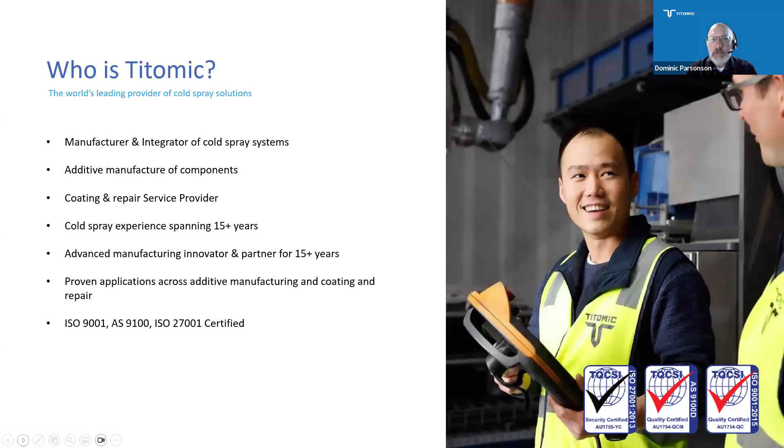So if you look at our low and medium pressure and high pressure activities in cold spray, we recognize the value that cold spray can add across a broad range of industries, but we try to narrow it down where we can add the best value, and we leverage the things that make cold spray unique. High-speed manufacturing, low heat-affected zones, ability to blend metals that typically don't belong together, and the ease of use in many applications.

So we have worked for the last 6 months with a large oil and gas company in Australia, looking at it not just as a technology work, but how do we certify it? How do we validate that it works over and over again, and working on repeatability? And this is where Titomic works with its team globally to ensure that we don't just provide you with a machine that sprays metal, but we provide you with the complete solution. Next slide.

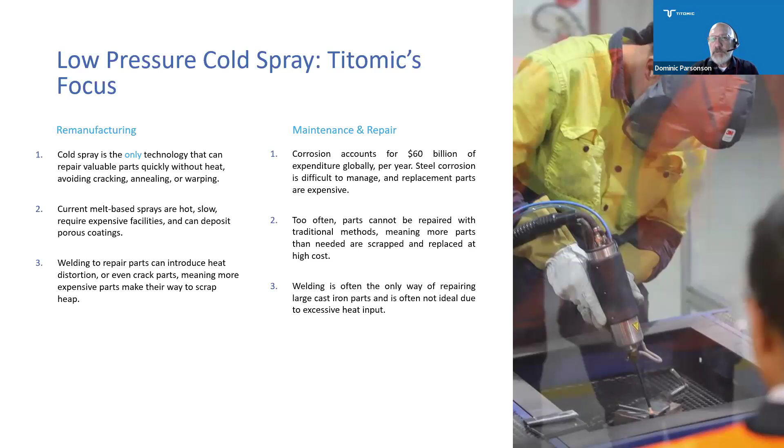And that's the key focus area for us, always ensuring that not only are we depositing a metal, but that we are depositing a metal that genuinely performs the way you'd expect it to perform. We don't believe it's good enough to be able to put material in a powder feeder, spray it, and say, look, we have sprayed metal. We believe in validating with clear data and performance specifications that this material behaves the way you would expect it to behave. And that's often work done from an R&D perspective within Titomic, or work done collaboratively with a customer or a research institute.

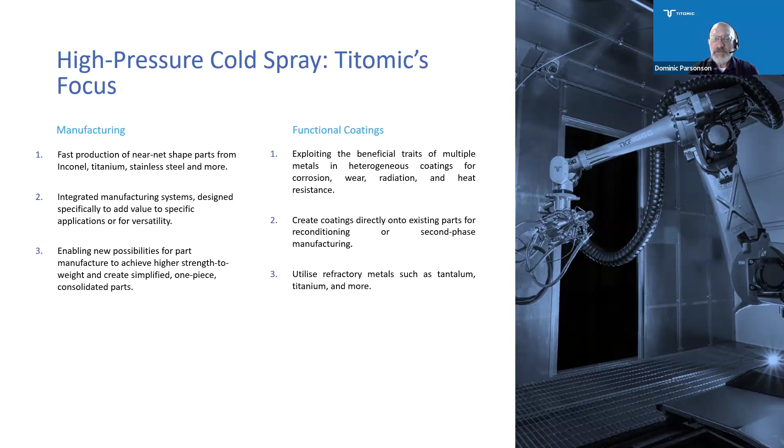We put a lot of effort into functional coatings, and functional coatings are coatings where the coating is more than just geometry restoration or corrosion, where we are adding the capability around thermal barriers or electrical performance. And this is an area we see enormous growth in both aerospace as well as electrical and terrestrial applications. Next slide. So Titomic is global.

We have head office in Melbourne, we have manufacturing and research centers in Europe as well as in Australia, and we have a small technical center in the USA, growing very, very rapidly. And in fact, I wouldn't be surprised if you see the USA starting to overtake the world in the next 18 months or so, if not quicker. We have a broad reseller network around the world, ensuring that we can provide service, support, and technology to our customers as they need. Next slide, please.

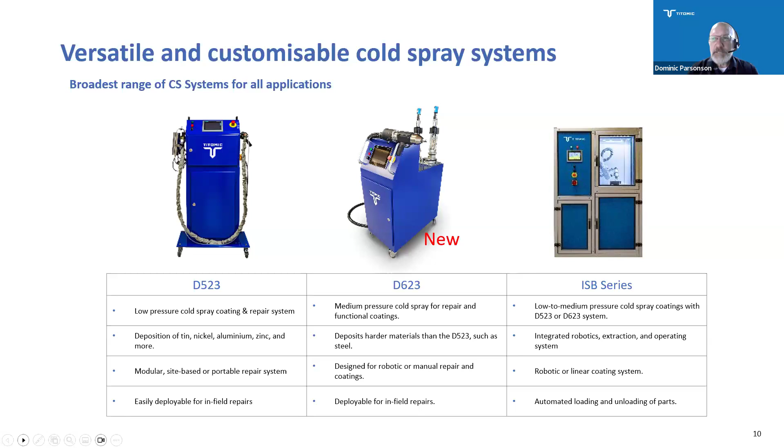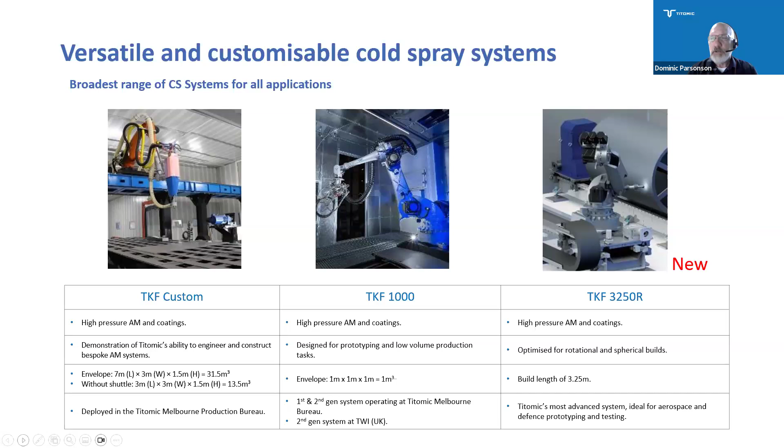And then we recently launched our TKF 3250R, which we commissioned in January in Australia, and that is our newest solution. So it's optimized for rotational and spherical builds, can do parts up to 3.2 meters in length and almost 2 meters in outside diameter, depending on the weight of the part. It's got an advanced and new control system, and it's something we're incredibly proud of. In fact, we have a photo of some of the Solvus team visiting us, where we were proudly demonstrating this machine to them. That has now been running for 5 months and is proving to be a phenomenal addition to our portfolio. Next slide. So that's enough about our machines and what it is we do.

Now I'd like to focus on some real-world applications. I'll be talking about the additive manufacturing opportunities and applications we've worked on. Neil will cover the coating and repair. So in additive manufacturing, we break our business into armaments, ballistic protection, structures, and tooling. And the reason we've done that is so it becomes easier to explain to the market what it is we're doing and easier to advocate for the technology. Those capabilities go into a broad range of areas: transport, automation, mining and resources, defense and aerospace.

But typically we favor anything that is rotational, cylindrical, spherical, or large flat surfaces that have a slight two-dimensional curve to it. And that's where tooling starts to add value. But the benefit of cold spray in all of these applications comes down to the well-known characteristics of high-speed deposition, excellent mechanical performance of the material, high density, and the ability to replace casting and forging with a near net shape as rapidly as possible.

So for those of you who may not be familiar with cold spray, we always highlight here that cold spray is not a competitor to traditional manufacturing. It is not a competitor to powder bed fusion or E-beam or any of those technologies. It's an added tool in the toolbox for a manufacturer to provide solutions to the marketplace. So we can't do those tiny, highly specialized parts you would typically see from a powder bed fusion type additive manufacturing space, but where we really add value is size, speed, and near net shape. Next slide.

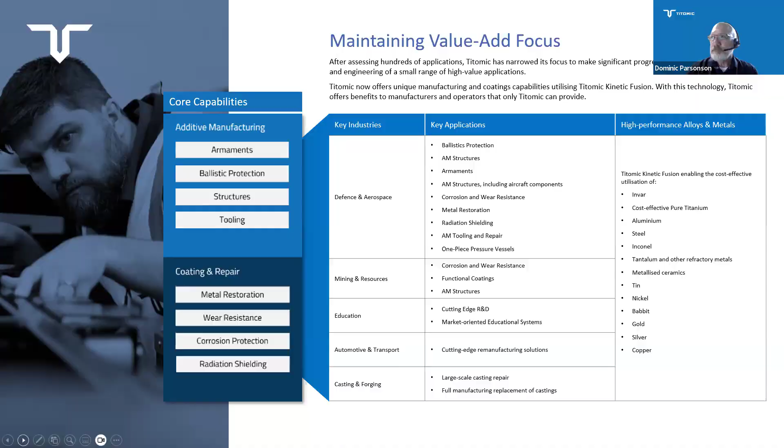So I've got a few applications I want to show you that are real-world applications. This is a very large rotational part that was produced in commercially pure titanium. And a number of you may throw your hands up and say, why commercially pure titanium? And I think I'll mention it now. Yes, we do a lot of work in Ti 6.4.

But commercially pure titanium offers a real sweet spot for our end users in cost of the raw material, speed of manufacture, and our ability to tailor the mechanical behavior of the commercially pure titanium. So depending on which recipe we use in our system, and we call them recipes, as those are naturally temperature, pressure, speed across the surface, standoff distance, etc., as well as heat treatment and HIP recipes if required, we can tailor the mechanical behavior of the commercially pure Ti.

So with the right recipe, we can get it to behave almost within 5% of Ti 6.4. And with some of the new developments, I wouldn't be surprised to see it match Ti 6.4. But the powder comes at least at a third of the price of typical Ti 6.4 additive manufacturing powders, which then starts to add the benefit to the customer of saying, are you using Ti 6.4 because you've always used Ti 6.4? Or are you using Ti 6.4 because you need it? Or could we look at an alternate, like commercially pure titanium, where you have price, speed, and technical opportunities? But again, to highlight, we offer both.

So in this particular application, the customer was making this large deployment ring for a satellite application, and he was intending to machine it out of an aluminium billet. But the wastage was high, time on the machining center was exceptionally long, and he was looking at a way to do it faster and cheaper. So we produced that commercially pure titanium ring, 1.2 meters in diameter, at about 60 kilograms in under 10 hours, vertical walls, holes, everything all in one go.

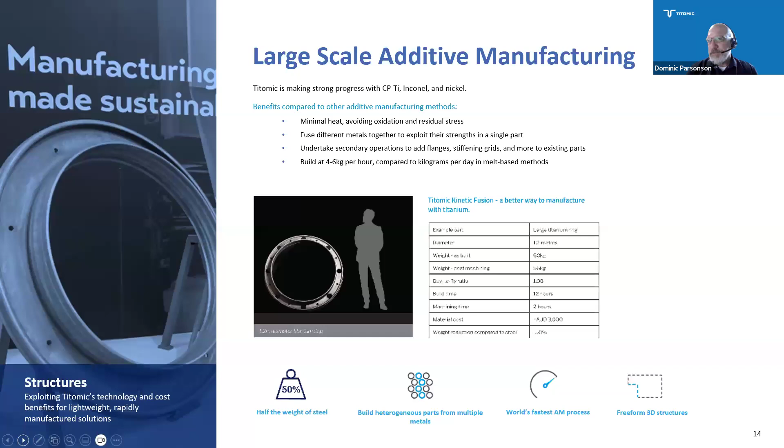And then if you include a heat treatment batch and a light machine on the exterior surface, we are talking about go to whoa of a few hours to get a finished pressure vessel, which offers some enormous benefits. Most of this work has been done on our TKF 3250, which is the one that we commissioned in January. And the benefit there is it's really fast, exceptionally well controlled, and designed to produce things like pressure vessels, barrels, flanges, shafts, and other freeform components. So this is the latest and the newest that we are working on and has been going exceptionally well.

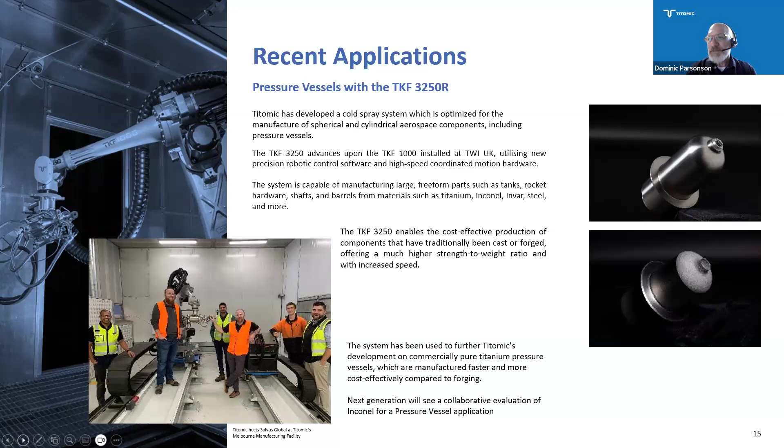This application is a great example of near-net shape replacement. So many of our customers come to us with a machining challenge. This particular customer is Jongia out of the Netherlands, who manufacture large ball valves for the food industry and other industries. But the challenge they had with this particular ball valve was it was being produced out of Hastelloy as a single billet and machined. And the time on the machining center was so long that for them to increase capacity or production rate would have been an investment in further machining centers, which was not viable for the size of the project.

So they approached us to see if we could produce it in Inconel or Hastelloy. And we looked at it and we thought that it would actually be well suited to commercially pure titanium. The strength matched. The titanium offered some weight and corrosion benefits. And the trial was around producing a near-net shape that would reduce their machining time, therefore increase their ability to produce a larger volume of parts per year. So that was done as a near-net shape rotational spray on our TKF 1000, done on a substrate. So the interior of the ball valve is almost to final tolerance. It needs a light skim machine to get it to final tolerance and smoothness.

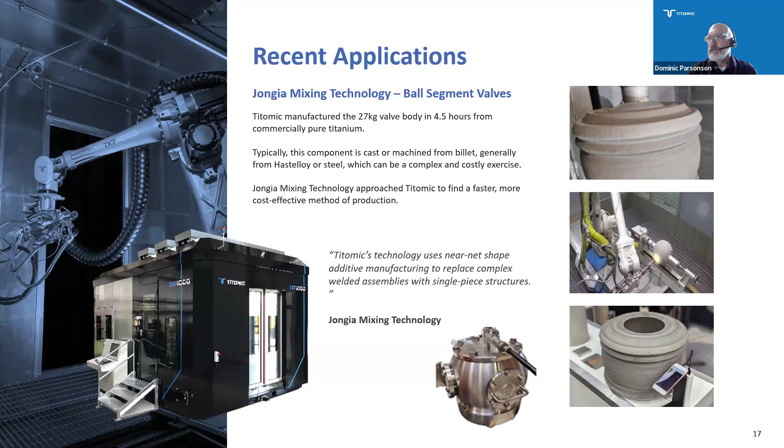And just to highlight, we've had some challenges with our videos. If it doesn't work, we will send it out separately as a URL. Nicole, are we going to try and do it via the link, or? Brilliant.

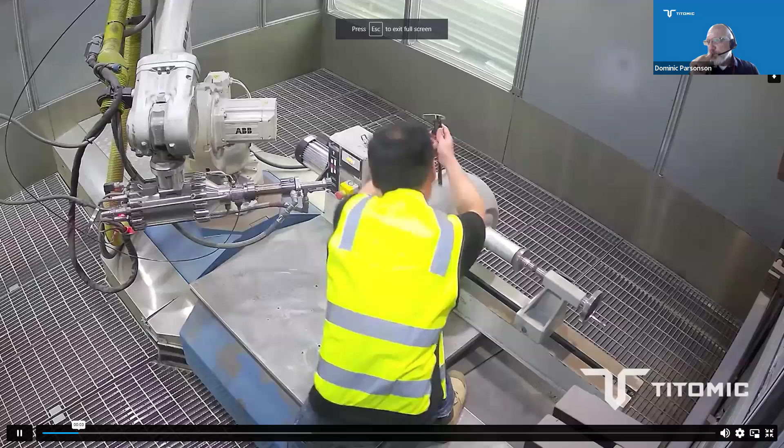So as you can see, what we start off here with is an initial substrate, or form, which becomes the inner of the component. We then measure it up, ensure that it's running parallel, that the dimensions are right, and then we spray the commercially pure Ti. And as this sprays, you can see how we manage the spray differently in different areas to start building that near-net shape. We are able to stop, go in and measure if required.

So the beauty of titanium cold spray in a number of applications is it is possible to stop and start with no negative impact on adhesion or mechanical performance. So if we had wanted to, we could stop this spray, ensure there's no nitrogen in the cell, go in, double check that everything is going to tolerance, that there's no unexpected behavior, and continue spraying. So one of the packages of work we've been doing over the last 3 years is actually ensuring that stop and start sprays have no negative impact on mechanical behavior, adhesion, or any other tolerance challenges.

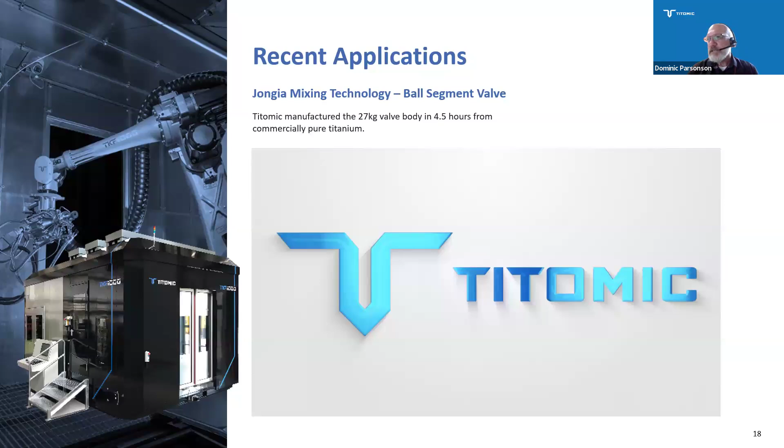So I believe that is now it for me. And next slide should be handing over to Neil to talk us through our coating and repair applications. Thank you very much. Thanks, everybody. Dom has done a wonderful job of introducing the concept of the equipment and the technologies, and made it quite clear the importance that we place on providing solutions. Are we able to go back one slide? I'm just looking at the presentation you currently have.

Okay, keep proceeding. Thanks. So effectively, what we've seen within Titomic, particularly over the last 2 to 3 years, is a significant growth in our repair and coating capability. And that growth is both as a service provider through equipment and solutions, and for a number of other elements. This is a particular element we have, which is a high pressure repair capability for our Melbourne trams. We are a little bit unique in the world that we still run trams. There are trams operating in other cities around the world, but it is a prime transport mover within Melbourne.

And they were having significant troubles in maintaining these large systems in service. So what we were able to do is develop a deposition procedure using nickel to replace the existing shaft coatings, and more importantly, focus the deposition in the areas of repair without disassembly. The significance of this in terms of an application and a solution to the customer is we went through a significant amount of testing and validation. What we often hear is that it is a technology for geometry. In part it is, but I think we all understand that cold spray and cold spray depositions do carry load.

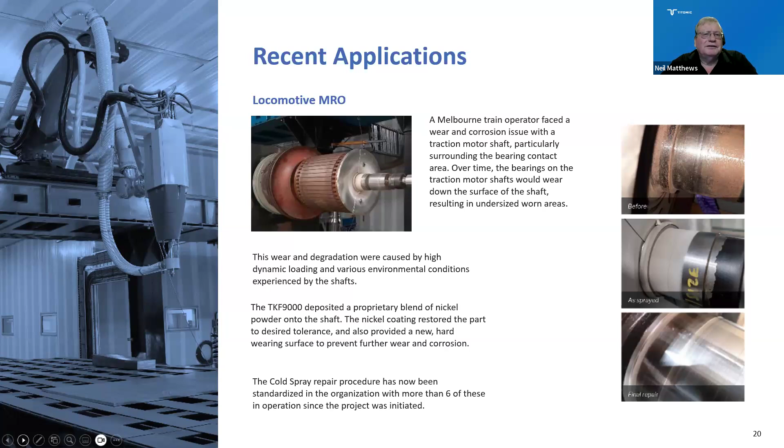We operate now in many industries, significant industries, and we've been in space. We've mentioned the transport industry, the rail industry. We're very active in the mining industry. We're very active in the gas and fuel environment, and we are also very, very active in defence. And that again comes through either the application of high pressure, medium pressure, and low pressure.

And again, this is one of the elements that we've actually been able to put product into space, and that's been successfully tested. Again, it was produced with our 1000 series system, and it was able to provide a lightweight solution in comparison with many of the other existing production processes.

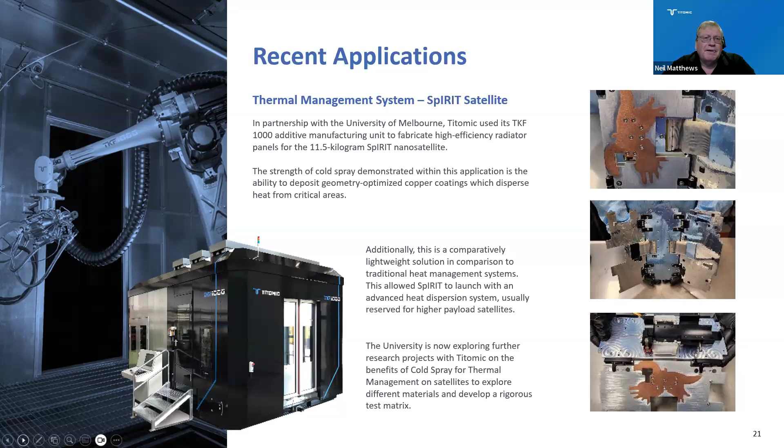We did a lot of this work, and we continue to do a huge amount of work with our research partners, and that can be a research partner, a defence research partner, universities, and other agencies that we have to assist us in the validation, in the testing, in some of the predictive modelling we do, and all those sorts of things. So it's very, very gratifying to see that we can actually develop these solutions, and this goes through a validation test program, which we agree with the customer. And that's their way of certifying and accepting.

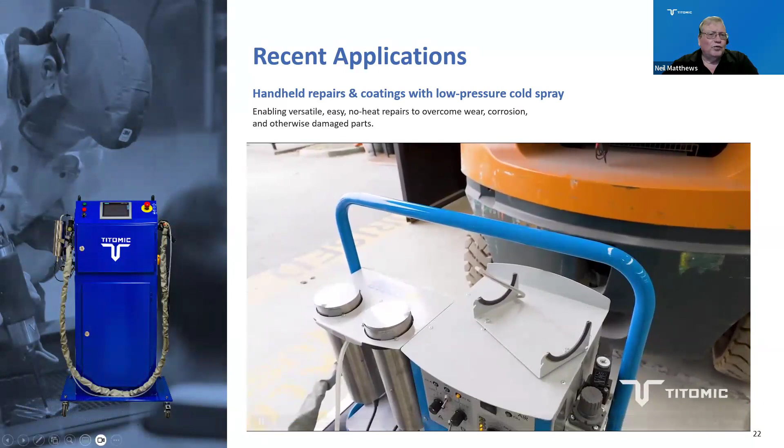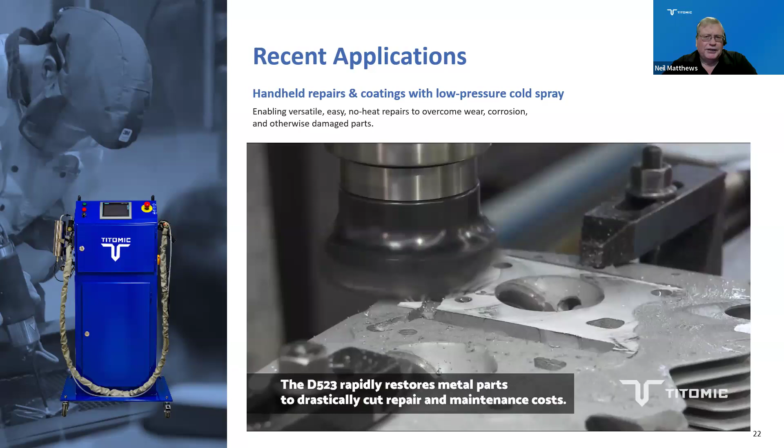We'll try another video. Handheld is a very, very significant part of our repair strategy, in which we are delivering technology to the target or technology to the customer. And this is a very, very active program that we have all around the globe. And it really is significant, where we have large pieces of equipment which are very, very difficult to disassemble, time consuming, and this is particularly relevant in areas such as the mining industry and the gas and fuel programs.

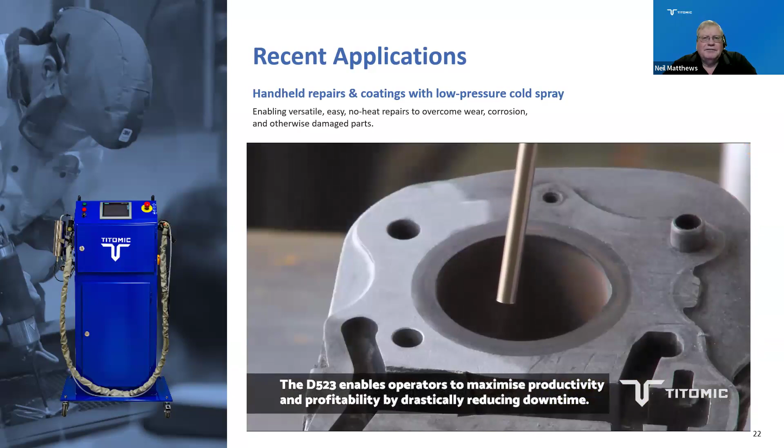This is a simple illustration of a repair of an engine component, and you can see how quickly it is. I think anybody that's familiar with cold spray has seen many of these photographs and images. And we have a number of elements in trial at the moment with our Defence Department in their land vehicle.

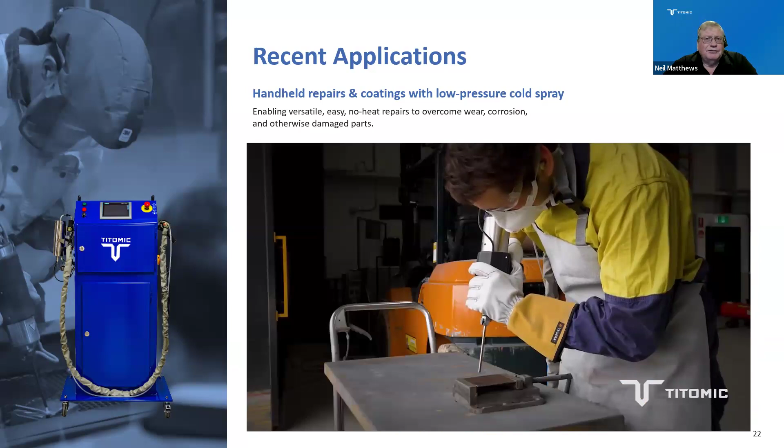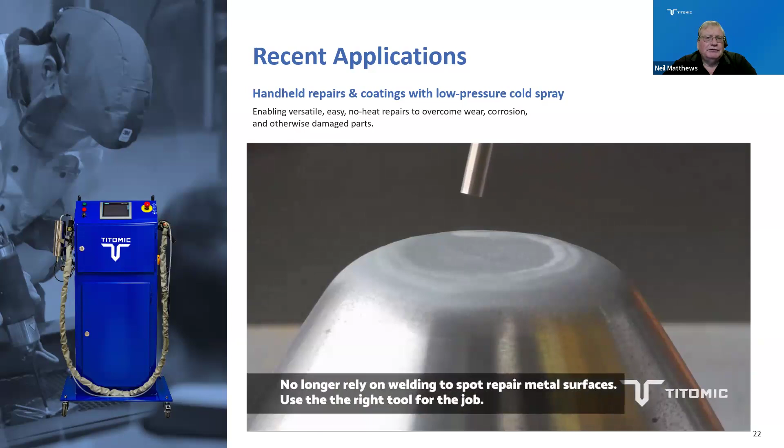We're working very, very closely with the gas and fuel, particularly in the element of corrosion protection and repair for large fuel compounds, particularly those that are in the marine environments. But again, I think what it demonstrates is that it's a very, very quick and very, very easy process to apply, and produces outstanding results.

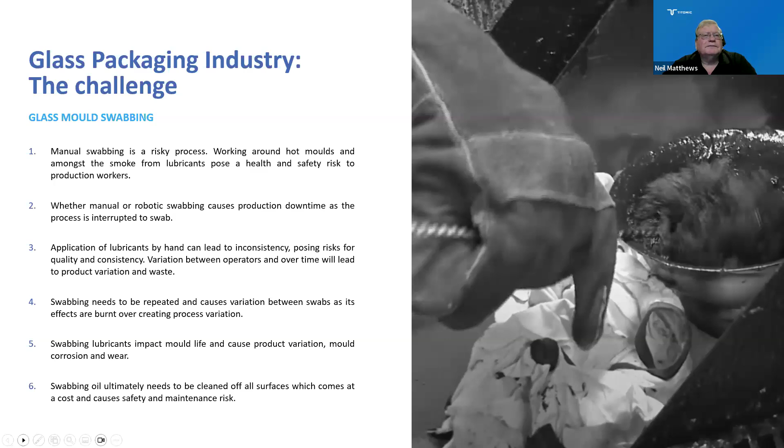Excuse me. So what we've done is, and this has taken quite a long time, and it does come through our company in the Netherlands, but it was to look at another way of reutilisation of molds in a timely function, and to be able to select molds, be able to scan them so that we can determine where the faults are, where the wear is, do a cold spray to create a hard wearing surface, and then do a performance check and a quality check to make sure that the mold was correctly aligned and the geometry was restored.

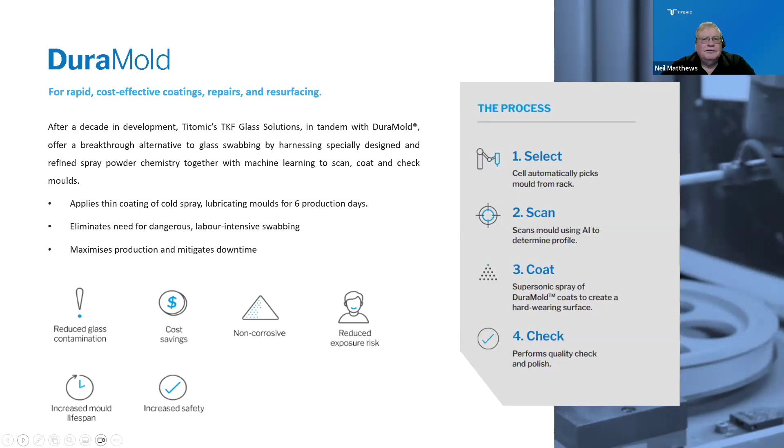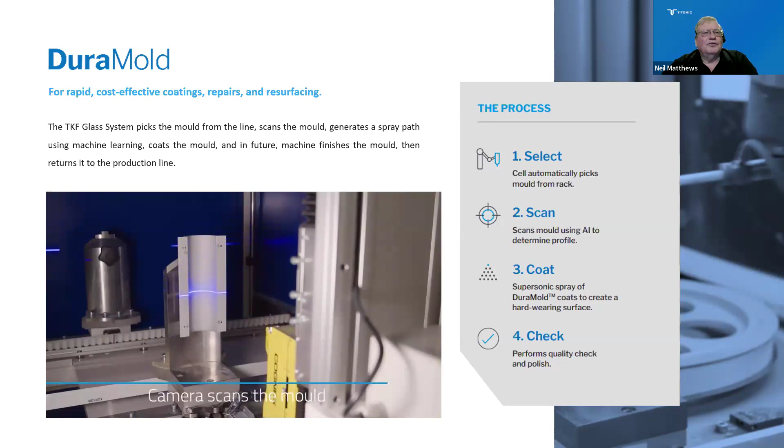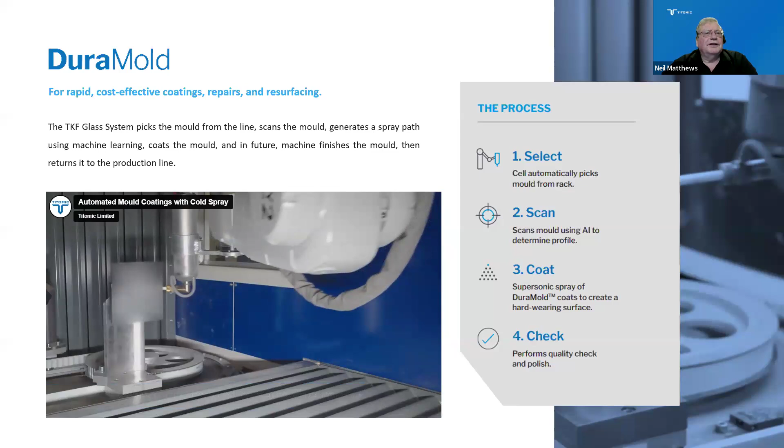We do have a video on the next slide to give you an indication of how you can integrate a number of existing technologies with cold spray. So what you've got there is that the mold's been selected, its profile's being measured. We then create a software program to recover the profile using cold spray, and you'll see that there. And then obviously a machining process, and then it goes back into service. So this is an automated process of taking it off the line, repairing the mold, and putting it back into the line.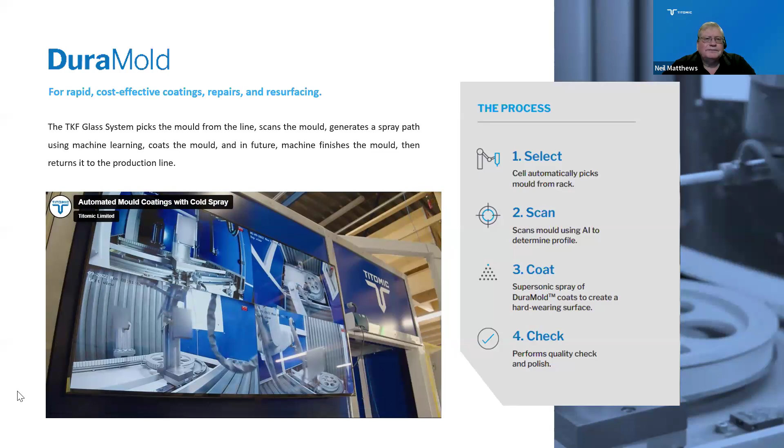Thank you. Next slide.

So what I wanted to touch on very briefly here is that we are conscious of the digital world, and we are very focused on how we can implement a number of the current digital parameters through our association with research organisations, and effectively using real data. We do have, particularly on some of our high pressure systems, the ability to record a number of output parameters. So whilst we're very conscious of the significance of monitoring input parameters, we're also very conscious of the need going forward to manage output parameters and to utilize those output parameters in a machine learning process.

If we go to the next slide, I just want to touch on a couple of these at the moment. So we look at some of our digital twin or virtual twin technology. The utilization of digital capability in a range of products is now enabling us to use some of the predictive models that have been developed, particularly for the likes of density and porosity and even mechanical properties, and use the output parameters that we're generating in the machines as part of a machine learning process.

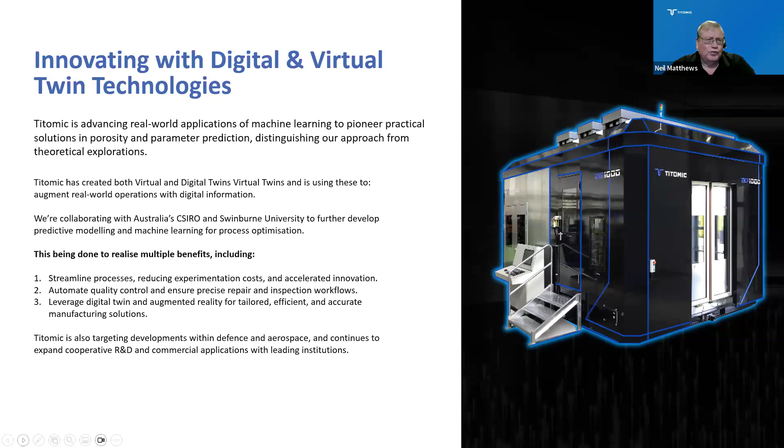The other one is tool path planning. That's very important to us, particularly in repairs of complex shapes and things like that, to enable us to ensure that we match the geometry. Next slide, please.

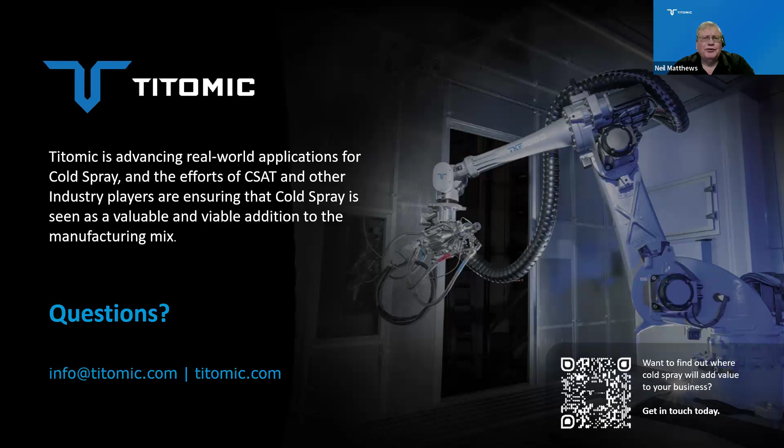Neil? Thanks, Dom. I think what we're seeing, from our point of view, is the ever growing portfolio of use cases and the value add that we continually get. A lot of these are driven by the customers, and a lot of them are asking very, very interesting and challenging questions. I think, as Dom has said, we're not competing with existing technologies.

We are basically utilizing this as a new technology, although it's been around a long time, but there is general acceptance. We have to continue to address the issues of certification and acceptance, primarily by customer or by regulatory authority. That's always a challenge. But the fact is that we've got all this information, we're collecting huge amounts of data, we're meeting the requirements of the customer, we're going to places that the other technologies won't do.

And what we're doing now and what we're seeing, we're being actually driven by customers rather than projecting a technology or a new way of doing things. So we're very, very encouraged, and it's in all industries, for all sorts of reasons. But fundamentally, if you really drill down to it, it's sustainment, it's the cost, and it's the time.

So if you start looking at that, it presents itself in most industries in different ways, but at the end of the day, they want product out the door, or if they've got product, they want it to be sustainable. And that's certainly what we're seeing in our Australian government defence situation, where they're effectively changing their focus from what I call new toys to how do we sustain these for the next 50 years, because we've invested heavily. So we're seeing this continually, and it gives us great faith and certainly great opportunity for the technology.